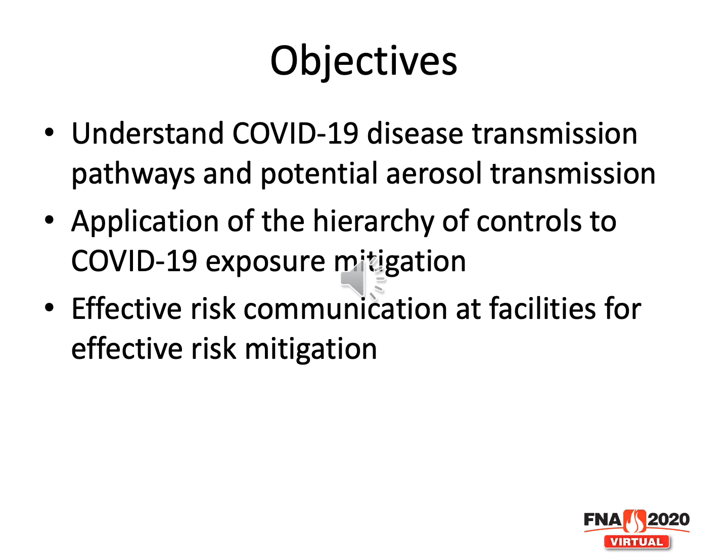Well, we include automation. Some of your facilities may already be partially or almost fully automated, depending on the operations that go on there. However, there are other facilities that are labor intensive that you cannot automate. Some facilities may have offices and customer service centers associated with them, or are vertically integrated into their operations. Those have to have people in them to do administrative work, managerial work, or customer service work for clients or end users. So automation may not be possible there.

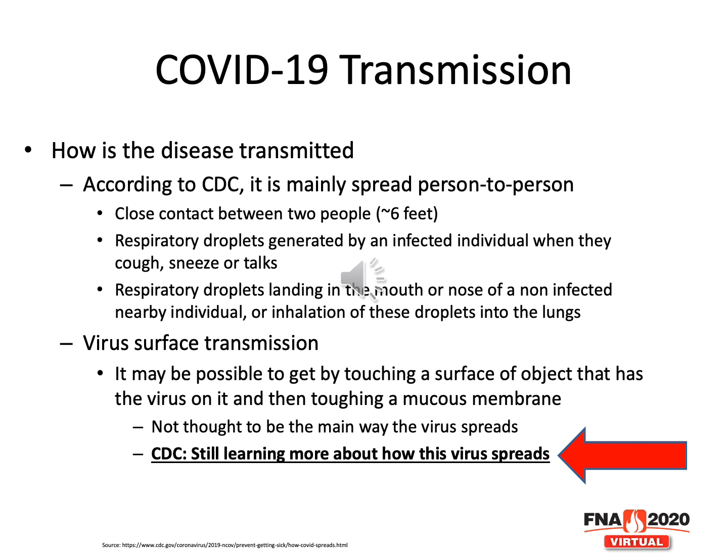One thing I'll point out has to do with updated science as time goes on: the CDC says we're still learning more about how the virus spreads. This is very important, because the more we learn, the more effective we can be at mitigating exposures and reducing risk from the virus itself.

As I said in the previous slide, CDC believes the main route of transmission is from respiratory droplets or person-to-person close contact, or from touching surfaces with contaminated materials on them, like a respiratory droplet or other mucosal secretions. One area that has gained traction recently, with mounting evidence, is the idea that the SARS-CoV-2 virus has aerosol transmission playing a part in how an individual may become infected.

Recently, there was a letter from 239 scientists across the globe. It's a little wordy, but important. In a document sent to WHO, they say they demonstrated beyond any reasonable doubt that viruses are released during exhalation, talking, and coughing, in microdroplets small enough to remain aloft in air and pose a risk of exposure at distances beyond 1 to 2 meters from an infected individual.

If you think of 1 to 2 meters, that's approximately an upper end of 6 feet. So within this publication, they're saying there's a chance the virus can spread beyond that 6 feet.

The document also says the airborne transmission pathway is the only plausible explanation for SARS-CoV-2 super spreader scenarios where crowded conditions were present and ventilation was inadequate. They've evaluated publications out there and identified that there are no other explanations for how some people got the virus other than airborne transmission.

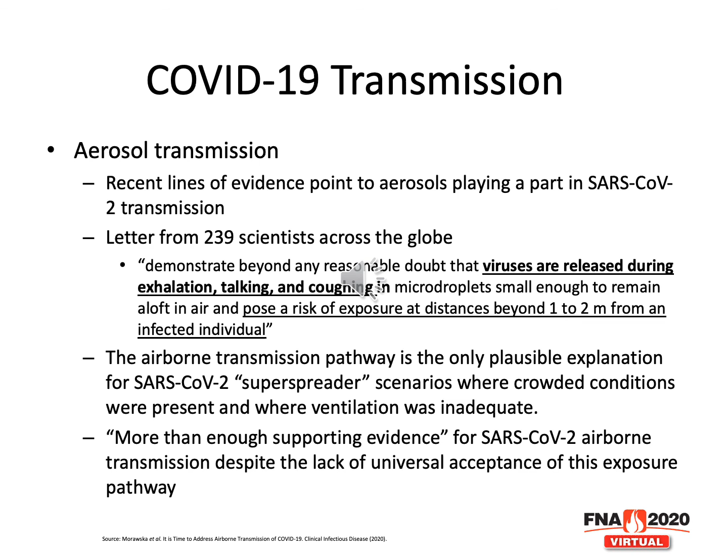As I said before, CDC says we're still learning how this virus spreads. The more information being published lends to the idea that there is airborne or aerosolized transmission of the virus, given the number of people becoming infected depending on whether it's a crowded condition outside or even potentially inside. This is what we're paying attention to in the science, because if there's potential for aerosolized or airborne transmission, we need to take precautions against that exposure.

As I said previously, the CDC believes it's mainly transmitted from person to person using respiratory droplets. So let's get into the distinction here a little on what aerosols are versus what droplets are. We've probably all heard these terms, used somewhat interchangeably by different people in different professions, but I want to break it down a little more.

Transmission of an infectious agent from respiratory secretions is typically classified by public health agencies as either respiratory droplets, greater than 5 micrometers in aerodynamic diameter, or droplet nuclei, typically less than or equal to 5 micrometers in diameter. Droplet nuclei, considered particles, are formed as a result of desiccation when suspended droplets dry out, a process that can occur in less than 1 second for droplets with a small initial diameter. So if you're breathing out very small droplets in an exhaled breath, that wet droplet can quickly desiccate into a small, dried particle.

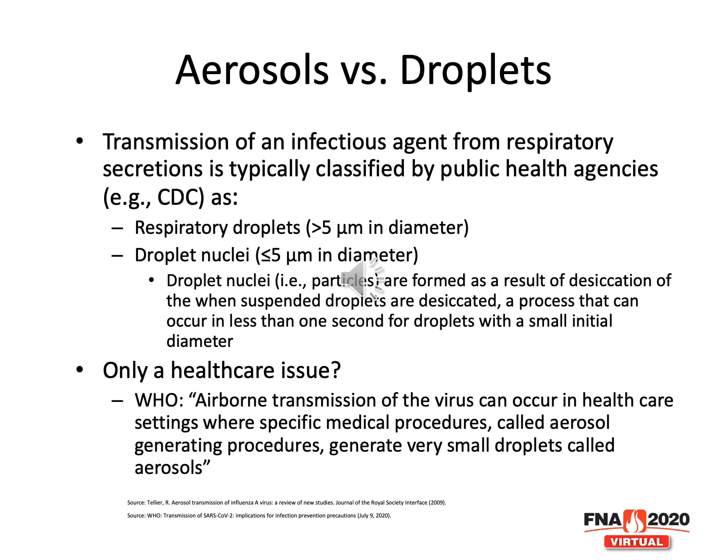That particle can stay aloft in the air for a certain amount of time. There's an idea that aerosol transmission is only a healthcare issue, and I put a question mark there because the World Health Organization says airborne transmission of the virus can occur in healthcare settings where specific medical procedures, called aerosol generating procedures, generate very small droplets called aerosols. We'll get into this a bit more next, but it's important to remember we're kind of all talking about the same thing, just using different terminology, which we'll get into next.

Well, now we're going to get a little discussion on aerosols. And what is an aerosol? If we're looking at the traditional industrial hygiene definition of an aerosol, it's a collection of solid or liquid particles dispersed in a gas, like air.

There's a large range of aerosols. They can range from the nanometer scale up to 10,000 micrometers and beyond. So I said before we talked about respiratory droplets, let's talk about respiratory aerosols. Typically, respiratory aerosols are up to a diameter of 100 micrometers. However, there are studies that have been done that show that depending on what activity we're doing, whether it's a sneeze or a breath or a cough, we can generate larger particles.

As I said, they can be from different activities. And just to clarify here, there's a terminology out there that is called bioaerosols, and that's simply an aerosol of biological origin, whether it may be a bacteria, or whether it may be a fungi, or it may be a human. There are still aerosols that we're generating.

And here's the main point. Aerosols versus droplets. Regardless of the name that we call it, both droplet types are classified as aerosols under the traditional industrial hygiene definition. So when we hear someone talk about aerosols, we are thinking in terms of how an exposure to a respiratory droplet or droplet nuclei may occur, because we know that those are encompassed within aerosols. We're going to get into a little more about aerosols in the next slide.

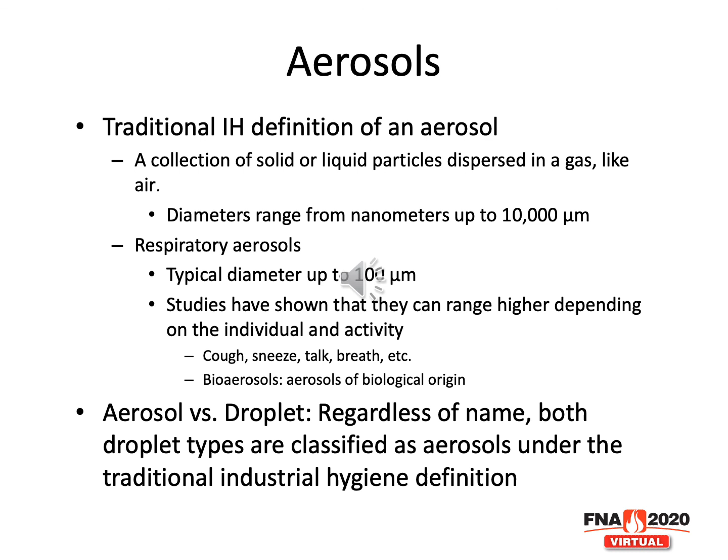So we've talked a lot about aerosols, so let's understand a little more about the physics of aerosols. Aerosols' physical characteristics are going to influence how long they remain suspended in the air. The size of the aerosol, the shape, and the density of the aerosol are going to be major players in how they travel within an airstream.

Larger aerosols will settle more quickly due to gravitational forces and air currents, whereas smaller aerosols will travel further. That's important to remember, and we'll look at that on this next slide with some information just so we get a visual on how it can potentially spread beyond the 6 feet that is currently in the guidelines.

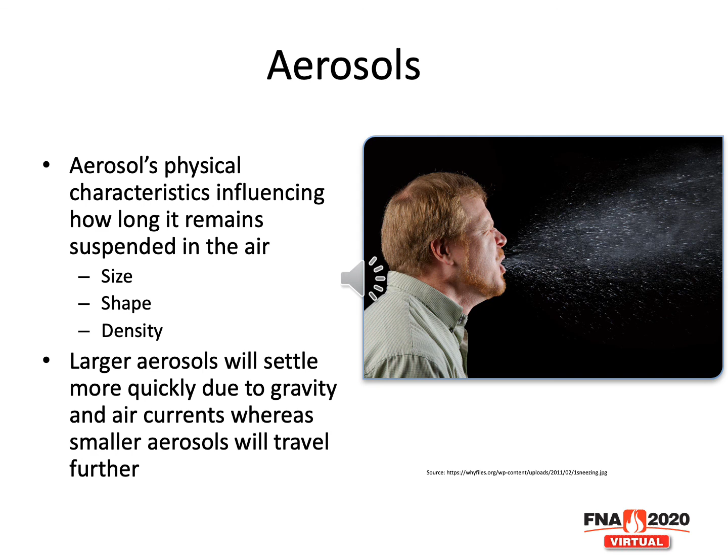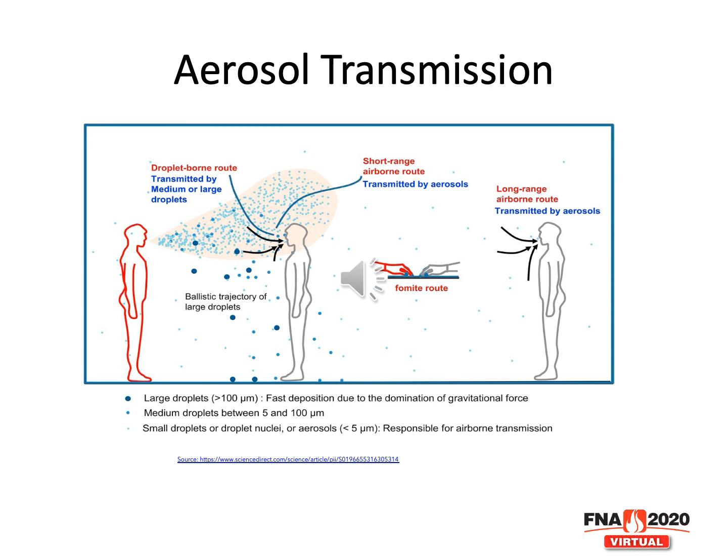The second talks about short-range airborne route transmitted by aerosols, and even long-range can be transmitted by aerosols as well. So there is a short and a long-range potential for aerosols. And again, as we discussed earlier, within the description here, it talks about small droplets or droplet nuclei, then it says, or aerosols. So we're all talking about the same thing, whether it's a droplet nuclei, a respiratory droplet, or aerosol. The virus doesn't care what you call it. The main thing is understanding the routes of potential transmission.

So now that we have all that information, where do we stand with SARS-CoV-2 and aerosols? Well, being in the research moment we are right now makes it very difficult. This research is going to be going on for years, and we're going to be able to use this information that we gathered here to guide best practices going forward.

One thing that we do not know now is the infectious dose or concentration of SARS-CoV-2 that will result in COVID-19. We just don't know that, which makes understanding some of the infectious routes a little more difficult. We have to presume that things will occur without knowing the concentration.

I like to point this out because this response from the WHO is kind of directly targeting that publication by the 239 scientists and other information and inquiries that they have received. It says WHO acknowledges that there is a possibility of aerosol transmission in non-healthcare settings, because up to now, other places have said, okay, if you're generating aerosols in a healthcare procedure, there's a possibility. But WHO says that there is a possibility outside of those settings.

They identified some that says crowded indoor spaces. Well, I don't know what crowded is. I don't know if crowded is 5 people in a 10 by 10 room or 50 people in a 10 by 10 room.

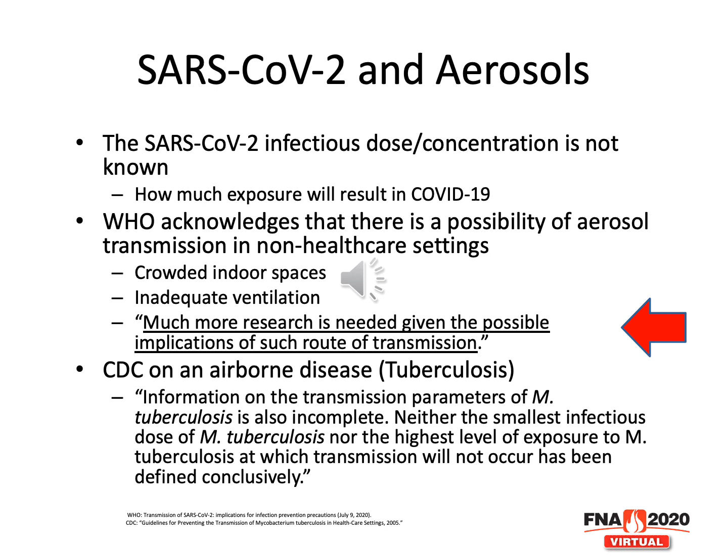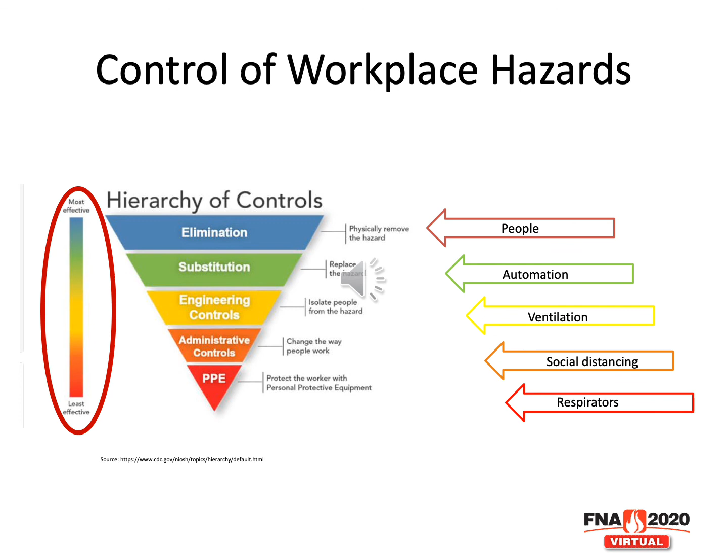So now we have a better understanding of aerosols and the potential other routes of transmission beyond just what is recognized in the guidelines. Let's look at how we can apply the knowledge that we have, the scientific knowledge we are gaining in the moment, to the hierarchy of controls and for protection of employees at your facilities. We're going to go here from the least effective, which is PPE, up through the most effective for this purpose, which is going to be ventilation. We'll get into that next.

So previously I said we're going to look at personal protective equipment, PPE, because it is the least effective, and I'll explain that a little more. PPE is typically the last line of defense when we're looking at something. When we're looking at the hierarchy, we want to see if we can eliminate it. We want to see if we can do something to substitute for it. And I'm not talking about COVID-19 now, what if I was talking about a chemical? If there was a chemical in your process where you needed to substitute it for something else that may be less hazardous, you can do that.

What about ventilation? We'll get into that. Installing local exhaust ventilation can be a solution. Administrative controls, determining how long someone should be exposed to it to limit their interaction with it. And PPE, if you can't do any of those other steps, you look at PPE and see what it can do for you.

So one characteristic of PPE is that it relies on user compliance. You have to make sure that the individual is trained and appropriately trained to understand how the PPE is supposed to be used, and how to keep it clean, how to recognize when it may not be effective anymore.

In the area of SARS-CoV-2 or COVID-19, we can look at this from a source control versus protecting the individual. PPE is going to protect the individual because it is personal protective, and it is going to be a source control if used appropriately. I'll get into some examples of that in a bit. Shortages, as we knew, of PPE resulted in novel methods for preventing exposures to aerosols generated from infected individuals. Some other issues with PPE are new or inconsistent disinfectant methods for reusing PPE, if anyone was doing that at their facilities.

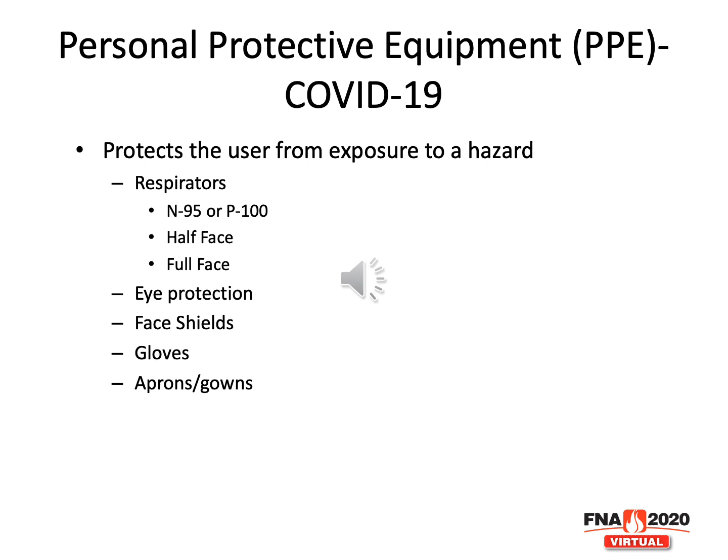As I mentioned earlier, there was a lack of availability for personal protective equipment. As I go through the next few slides, one topic is risk communication. I'm going to factor in some risk communication here for what we want to get across when talking about personal protective equipment.

As I said, there were disinfectant techniques, and there are also people using novel methods for preventing spread and novel materials for masks, which makes things a little more interesting. There are two clips from news stories: one says a nurse in Texas developed a mask with better filtration than N95, and another says an innovative mask blocks 99.9% of particulates, making it about 4% more effective at blocking particulate material than an N95, according to a physician who's a professor at a university.

It's important to understand that personal protective equipment like a respirator is engineered and tested to have a particular fit, to work a certain way. It will fit against your face in a certain way. You have to get the appropriate size and have those respirators fit tested to make sure they're not leaking, because air will look for the path of least resistance, and if there are air pockets around the mask, air will go around it, between the mask and the skin.

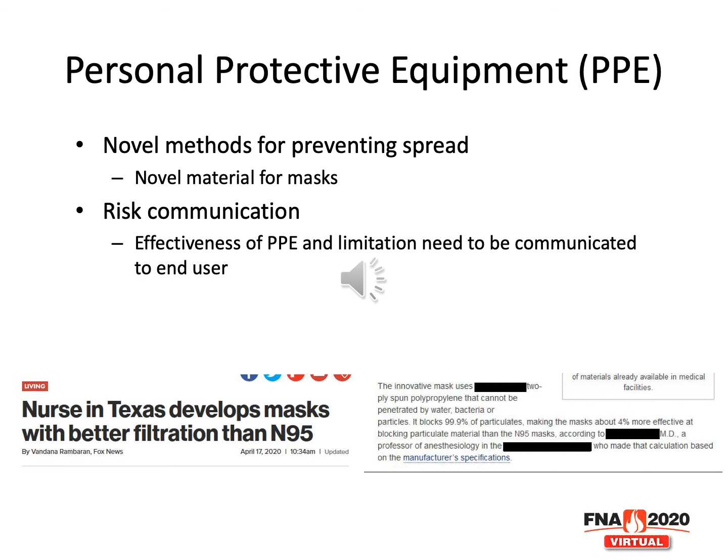So it's important for effective communication of risk in these types of scenarios, because you don't want someone to have a false sense of security from a piece of PPE you give them when the person who made it doesn't fully appreciate what is necessary for the testing and requirements for a respirator.

I'll quickly discuss face coverings here. A face covering is what I would consider an administrative control. Face coverings are not personal protective equipment. Face coverings only serve as source control.

That means they are controlling aerosols or respiratory droplets, or droplet nuclei, or whatever you want to say, from an infected individual. It is not a means of personal protection. So that means that individual wearing a face covering or face mask is not going to be protected from anyone else. They are protecting others from themselves.

What are some examples? Well, there's surgical masks out there. There's a variety of cloth masks, and I've seen studies with one-layer and two-layer masks. They're made of cotton, made of polypropylene. They may be pleated or not. There are also people using bandanas or something called a gaiter or neck covering.

What is interesting is there have been studies done for years, 10, 15 years, on different kinds of face coverings, and I'm not going to get into the efficacy of these different face coverings, other than to say a recent study came out to evaluate individuals who are generating aerosols, and they looked at neck gaiters. The material that neck gaiters were made of actually created more aerosols or more particulates in the air than just normal breathing or coughing without anything covering their face.

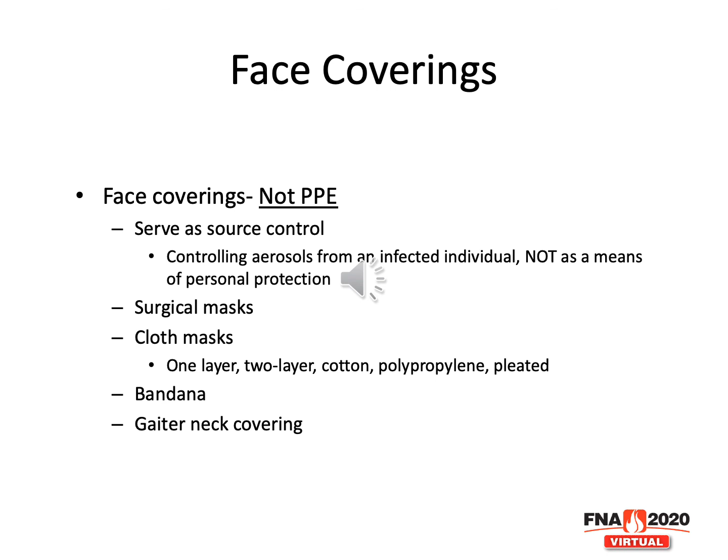...is that if someone is touching their chin because their mask is too high, and then they pull the mask down over their chin, whatever was on their hand is now on their chin. And whatever was on their chin is now on their mask. So when they pull it back over their face or mouth, whatever they may have contacted on their hand is now directly in their breathing zone.

So it's important for you to consider not only using uniformity when doing a respiratory protection plan, using respirators or face coverings, but also that people understand effective ways of using them and how not to use them. So again, I go back to the risk communication aspect - this is very important.

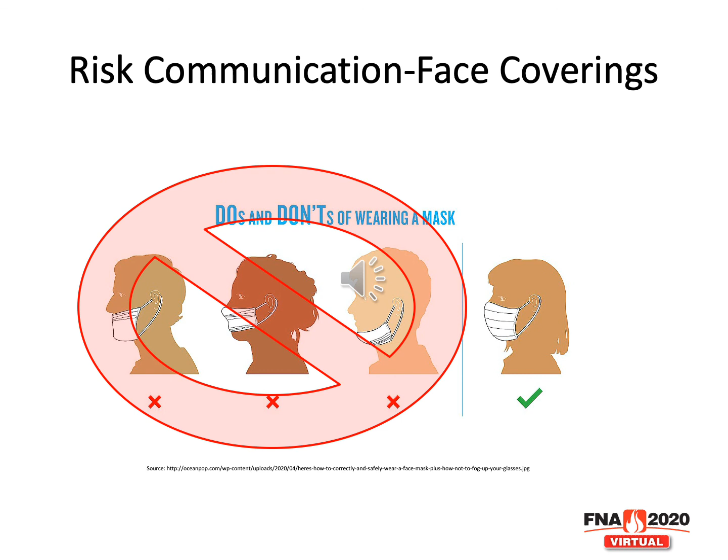The next highest step in the hierarchy are administrative controls. We're going to touch on this briefly because I went into more detail on administrative controls in another presentation called Plant Cleanliness and Facility Risk Mitigation from Closure Due to COVID-19. If you'd like more information on administrative controls, that's a good presentation to gain that information.

So what are administrative controls? They are actions taken by management to reduce potential indoor exposure, whether it be to COVID, the SARS-CoV-2 virus causing COVID-19, or any other kind of chemical or biological exposure you may encounter in the workplace. So what are those kinds of administrative controls?

Well, there are changes in how employees interact with the work environment. That could be an assigned work zone. It could be assigned workstations. It could be assigned tools for that individual to use, or even shift work.

It's about workplace cleaning. I get into that in detail in the other presentation, on why you need to clean, what needs to be cleaned, and how you do a facility evaluation. Another administrative control is social distancing. How do you zone employees when you're social distancing them? Depending on the amount of employees in the space, you may need further distancing. And again, if there is aerosol transmission, how does that play into how you manage those employees?

So the next more effective control that we look at are engineering controls on the hierarchy. When we're looking at engineering controls, they place a higher level burden at the facility level. It takes the individual out of the compliance equation. That means that we don't have to rely on them to appropriately use face coverings or PPE because the burden is on the facility and the mechanical operations in that facility.

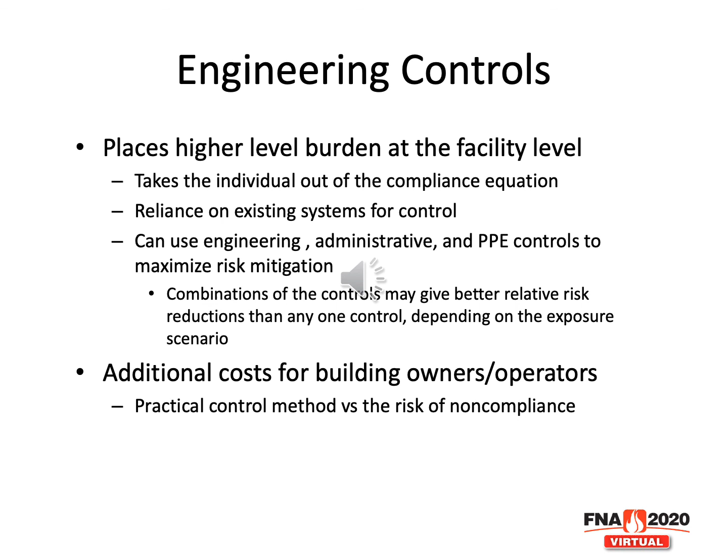But there are practical control methods that you can look at, and you have to weigh those versus the risk of non-compliance. We'll get into some of those practical control methods in a bit. So we'll discuss some examples of engineering controls and get into them in a little detail.

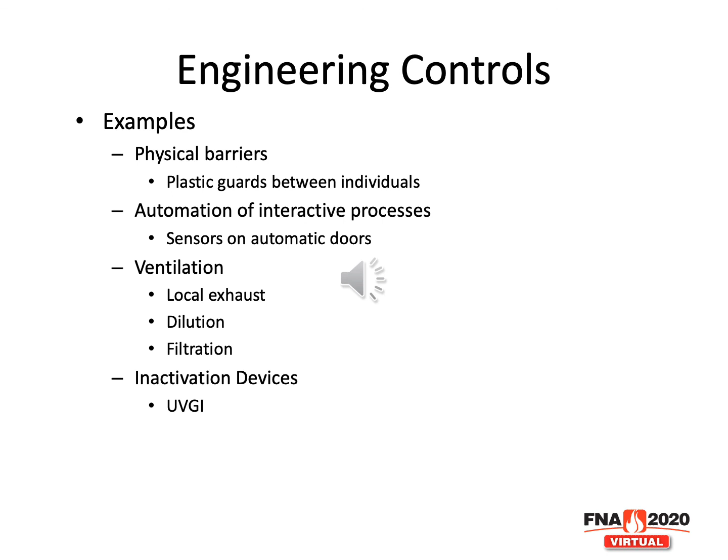The first example is a very simple engineering control. It can be a physical barrier. It places a plastic guard or any kind of other guard between individuals. What about automation of interactive processes? There can be sensors on automatic doors. How about ventilation, as we said, local exhaust ventilation or dilution ventilation, depending on the setting, and even filtration, or inactivation devices like ultraviolet germicidal irradiation, or UVGI.

But the people behind those barriers have masks on, and if you can't understand what they're saying, they get up close to the hole, they pull their mask down and speak through the hole. So if they are doing that, is that physical barrier still an effective barrier at keeping people's personal zones separated? Because as soon as you compromise what you're doing to protect yourself, getting up close and pulling your mask down, that barrier is no longer going to be effective for what it is designed for, if it is providing any protection at all.

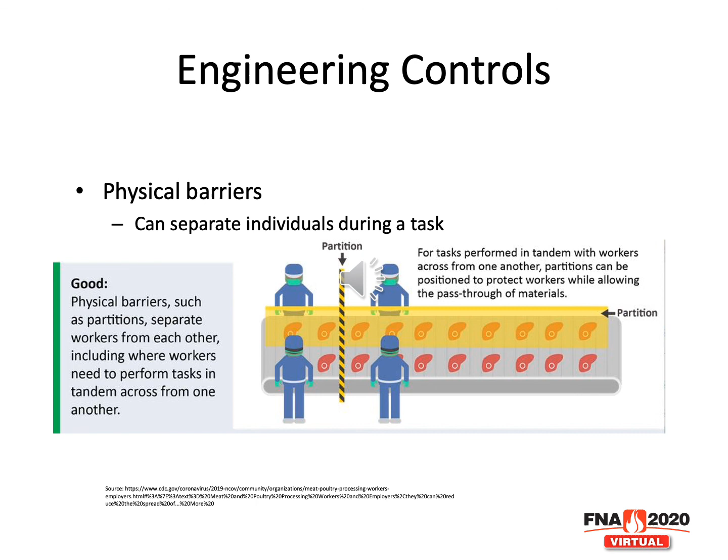Because again, there's different sizes. Some stores I have been in have very small plastic sheets as sneeze guards in front of the cashier or wherever you go. Other places in front of reception have these huge plastic sheets that go almost all the way to the ceiling, and we'll get into this here in a minute because there are some ventilation areas behind there that could be pulling air from one side of the barrier to the other. So you have to take the physical environment into consideration when you're establishing these physical barriers.

Well, what about automatic sensors on facilities? As I discussed in the other presentation on plant cleanliness, you want to look at areas that are high touch. If there's a door handle or a doorknob or somewhere that people are touching often, you may want to clean that more often. One way to eliminate the need to have that contact is with automatic sensors on doors. They can reduce high contact points, as I said.

What about if you're in a bathroom and you have an automatic sink? Instead of having handles, you can have an automatic sink. However, there are issues with automatic sinks as well.

As I discussed a little bit in the plant cleanliness presentation, I also do Legionella investigations of facilities and the impacts of those, and those can be problematic. The solenoids on automatic sinks have been shown to harbor Legionella bacteria. So you have to weigh one engineering control against another, one hazard against another. Are you taking care of one potential transmission route for SARS-CoV-2 by installing automatic faucets on sinks, but potentially introducing another hazard like Legionella into your facility by doing that?

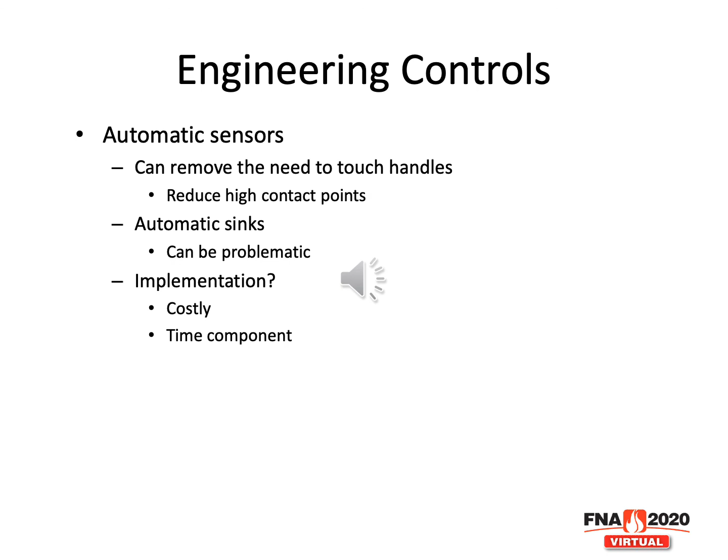These are just things you have to consider if you're wanting to make changes. What downstream effect are your engineering controls potentially going to have on employees at your facility? You'll also have to look at implementation of those. Can that be done quickly, or is there a lag time on that? It's costly as well in certain scenarios, especially if you're talking large projects or large operations. All that has to be considered when you're looking at potentially using automatic sensors as engineering controls.

So the one I'm going to spend a little more time on here is ventilation. If we are looking at something that could potentially be aerosolized, ventilation may be a practical way of reducing exposure to that aerosol. It can be effective. The American Society of Heating, Refrigerating and Air-Conditioning Engineers, ASHRAE, put out a position paper in April 2020.

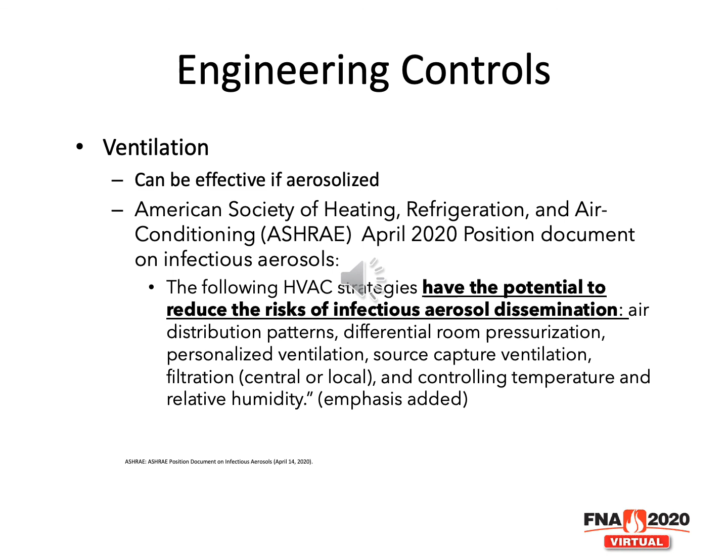Within that document, it says the following HVAC strategies have the potential to reduce the risk of infectious aerosol dissemination: distribution patterns, room pressurization, personalized ventilation, capture ventilation, filtration, controlling temperature, and relative humidity. So ASHRAE has acknowledged that using HVAC strategies or systems have the potential to reduce the risk of infectious aerosol dissemination, and we're going to detail that a little more, especially if the aerosol transmission route is a potential way that people become infected.

Depending on your operation, you may be familiar with this first one: the use of local exhaust ventilation. Here's a picture of an individual doing some welding on what looks like a pipe using some LEV, which focuses on an individual's task to control source exposure. There may be a limited application of this methodology due to the design of the system and reorientation of personnel. Is it possible to use local exhaust ventilation to mitigate exposure from this? It may be difficult, again, due to the design of the system - the capture velocity of these systems may not be up to snuff for what's needed for an aerosol.

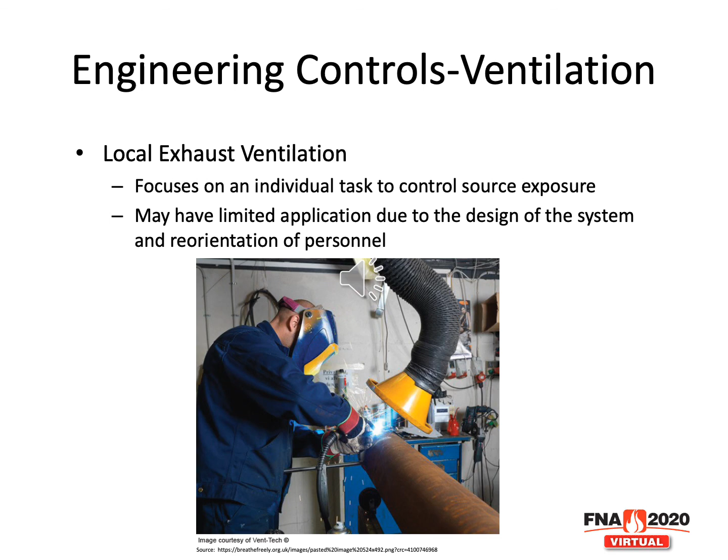And if you're having to require one individual to stay close to this local exhaust ventilation, it may not be feasible for an entire work shift. The other type of ventilation, which is probably a little more practical, is the use of dilution ventilation - that's using quote-unquote clean air to dilute the indoor environment, lowering exposure through dilution of indoor contaminants.

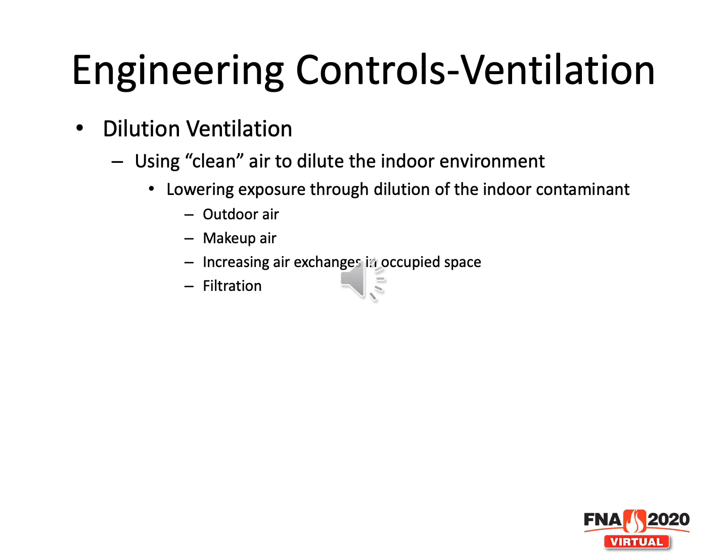You're going to be using outdoor air if you have a facility that is a shell facility that is indoors but not conditioned. You may have vent fans blowing outdoor air into the facility for a dilution effect. You may have makeup air where you're bringing in air from another area to dilute the air in that one particular work zone. You can look at increased air exchanges in an occupied space - if you have a set volume of air moving through an HVAC system in an office space and you want to increase that, that may be a viable option. And use of filtration - there are different filters you can use to increase the capture of any particulates that may be in the air.

So I want to talk about outdoor air for a moment. There are some indications, some guidance, suggesting that increasing outdoor air introduced into a space is beneficial, and some suggest 100% use of outdoor air in your space instead of doing any recirculation. They say you can open windows in a space, you can use outdoor air dampers on HVAC systems and open those to the fullest to get as much outdoor air within your systems as possible.

However, there are potential drawbacks to that. Again, everything we discuss here, whether it's ventilation, administrative controls, or personal protective equipment, is going to be very context specific to your one specific facility or location of concern. So for example, if you have an area with high humidity and you have an office space using 100% outdoor air, let's just say, you may be dealing with issues of high moisture content in the indoor environment.

You could be introducing moisture into building materials, and that could lead to the potential growth of mold. So that's one thing to keep in mind. If you're opening outdoor air dampers on HVAC systems in high humidity environments, you may be overworking the system. It may not be able to fully remove the humidity you're introducing, and it could be both overworking the system and underserving the conditioned space.

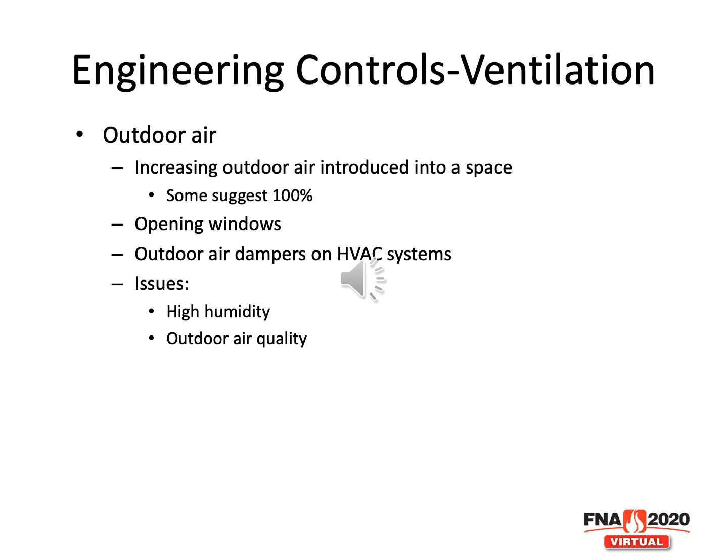Along the lines of ventilation, you can use enhanced filtration in HVAC systems, including a higher rated filter that may capture more particulates. You can look at using HEPA filters, which capture 99.7% of airborne particles down to 0.3 microns in size. You could also look at using higher MERV filters, minimum efficiency reporting value, of MERV 13.

But you have to understand that if you put something that's going to occlude airflow in a system, you may have to increase the airflow in that system, and sometimes system limitations may prevent the effectiveness of those filters. We'll get into this more in the next few slides, but that may be one thing you can do in a facility, area, or workspace to increase the effectiveness of ventilation.

But again, that risk has to be communicated. What is the risk of using these enhanced filtrations? Well, you could be overextending your HVAC system if it's not designed for it, or it may not be capturing what it's supposed to, or it may not be cooling or conditioning the indoor environment the way it should. Those are things you have to keep in mind when you're trading one potential control for another.

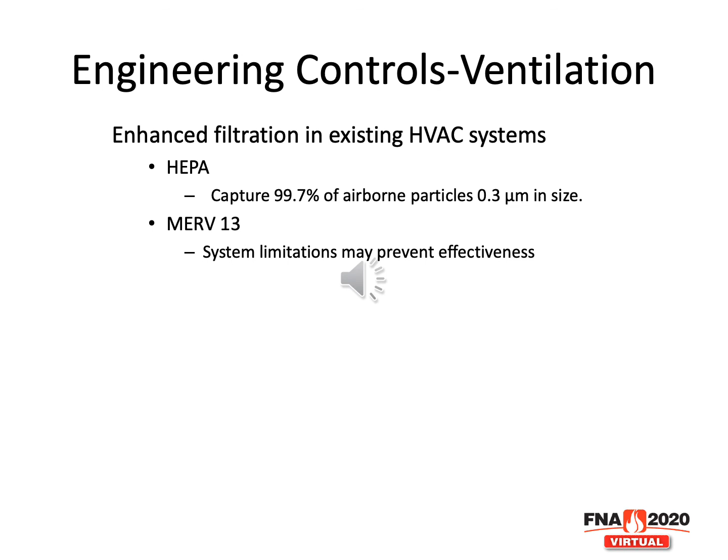As I mentioned, you can use filtration as one way to ensure aerosols or particulates in the environment are reduced. Another method is increasing room air exchanges to reduce exposure. This is typically used in healthcare settings and scenarios, which have a certain minimum number of air exchanges per hour, ACH, required to make sure people in that space are not exposed, and that anything generated by an infected individual is captured, whether for COVID-19 or any other disease or virus that may be transmitted.

These are minimum established capture velocities or air exchanges from the CDC. So if you don't have an HVAC system that can be cranked up that high, or you have a large airspace or area that just won't fit, or it's not feasible to do it through the HVAC system, you can look at using portable HEPA filtering devices to help achieve those additional air exchanges per hour.

Some of you may have seen these devices. They're called air scrubbers or negative air machines, and they move a lot of air through them - that's what they're designed to do. Based on numbers for healthcare settings, the target, if you want to reduce exposure, is at least 6 air exchanges to have an impact on an occupied space. You may need more units depending on the size, condition, or layout of the space. So that's one thing to consider - you have to account for the physical environment when establishing these engineering controls.

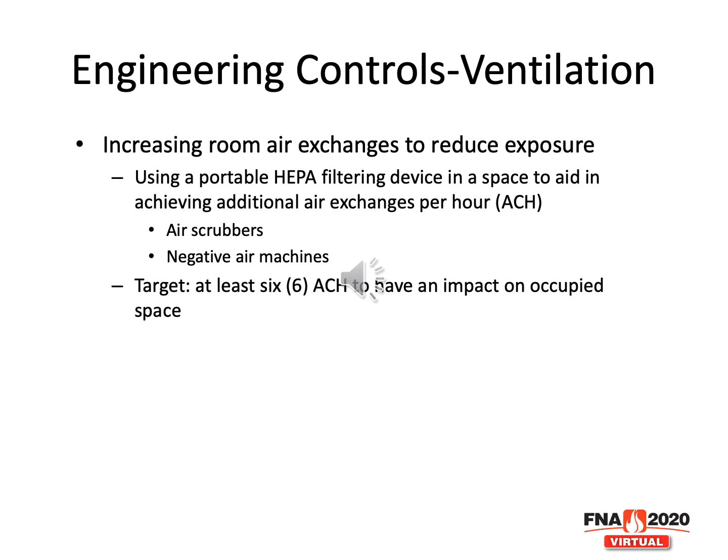you want to make sure that you're not replacing one hazard for another. These devices need to be cleaned on a schedule. Anyone who's doing that cleaning needs to take the appropriate precautions. If these devices are intended to capture aerosols, they are going to have those aerosols concentrated on the filter within them. So again, effective risk communication to the person responsible, whether it's an internal person or an external third-party vendor who comes in and cleans these.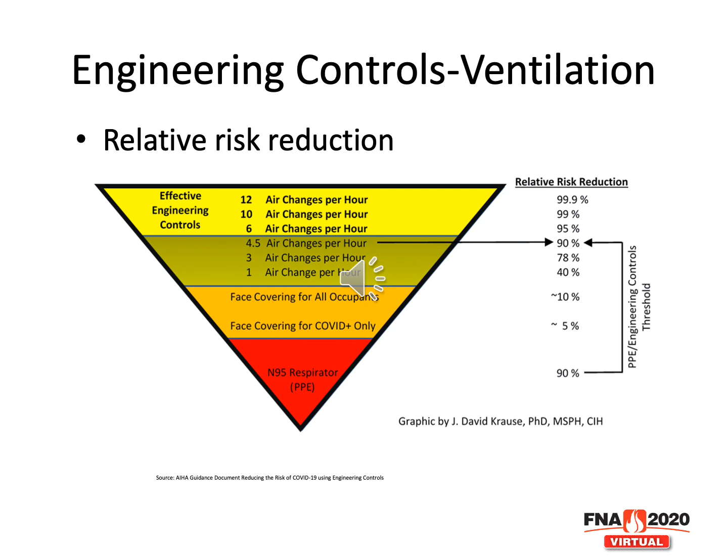The last control method we'll look at is ultraviolet germicidal irradiation, UVGI. These have been used in healthcare settings, and they are also used in other particular settings. They may result in reduction of airborne infectious agents via deactivation. The problem with potentially using some of these is the installation and use may require modification.

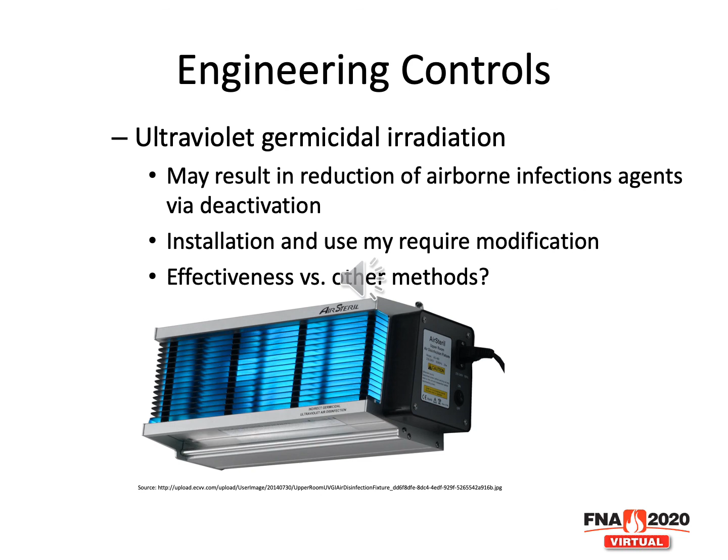What is the effectiveness of these methods versus other methods, and what is the exposure going to be from UV radiation to your employees? If you have a large area, do you need one of these or do you need 15? And if you have 15, what exposure are the people around going to incur? That's something to keep in mind. Are you mitigating one hazard and replacing it with another that you aren't understanding or aware of in terms of potential impact on your employees? We'll cover that a little more in the next slide.

I covered this a bit in the plant cleanliness and facility risk mitigation presentation, but it's important to note that these technology controls could also be considered engineering controls. There are technologies people are selling for installation in different facilities to either clean the air by introducing ions or ozone, or using cleaning methodologies with novel application techniques.

Let's cover the first one. There are a number of different devices that may be installed in the HVAC system called plasma air cleaners, or ion air cleaners, something like that. These, depending on the product, may be introducing harmful byproducts into the workspace. I know some of them have data available on what they do.

I've seen some safety information from the manufacturer that I question how they came to, because it's not clear. So if you're introducing any type of product, whether it's plasma, this vaporized hydrogen peroxide system which requires very specific use conditions because it introduces a vaporized form of hydrogen peroxide into the air, or if you're using ozone generators to clean the air, you need to have a safety and health professional evaluate what you're thinking about using.

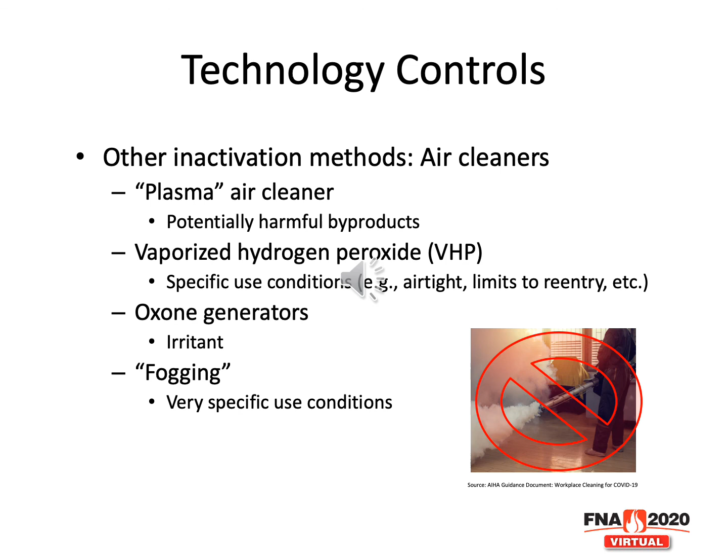A good resource for these and other documents is backtoworksafely.org. On there we have industry-specific guidance for businesses to safely reopen and re-engage. So if you want to find any of these, you can easily go to backtoworksafely.org and download them.